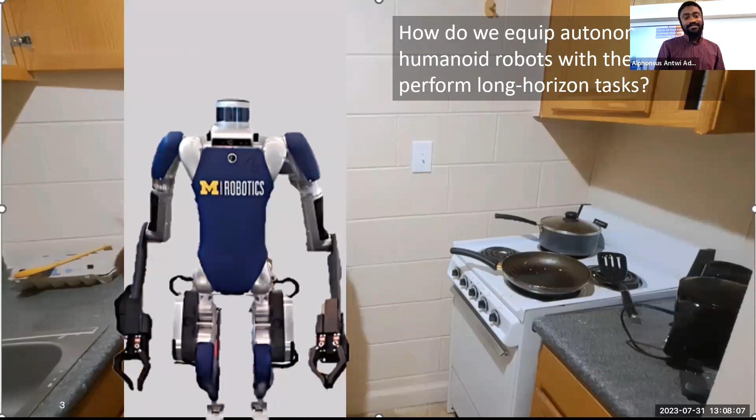During my PhD, I've been thinking of this main question: how do we equip humanoid robots with the ability to perform long horizon tasks? In summary, how do we replace the Alphonsus with the Digits and get it to do all of the kitchen tasks we want it to do, clean our kitchen, cook meals, etc.?

And you might be wondering, is this actually possible? Do we have humanoid robots that are capable of doing this? And I would say, yes, we actually do.

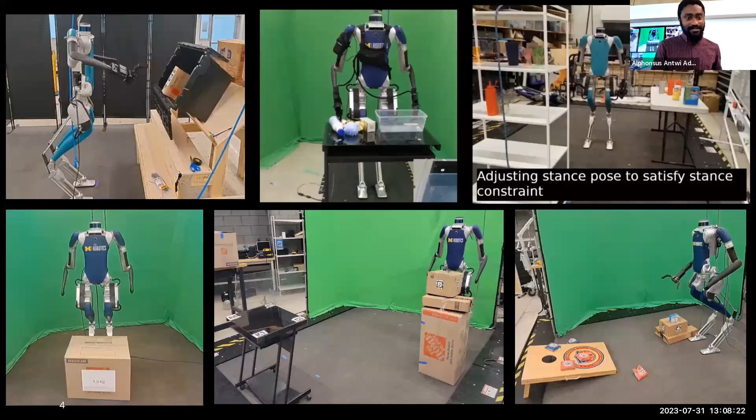You can see from these cascades of videos of the humanoid robot Digit doing some really cool manipulation and mobile manipulation tasks, like picking up a package from a bin, packing groceries into a container, transporting cookie boxes from one place to the other, lifting boxes of unknown masses, transporting boxes, and even playing cornhole.

And all of these videos are not high production videos. All of these videos were basically from experiments performed right here in the robotics department, mainly downstairs in the biped lab. So we certainly have the hardware and even the mature control systems to get humanoid robots to perform all of the domestic tasks we want them to perform.

So what is still holding them back? Why don't we all have Digits in our homes doing our chores for us? To answer that question, let's look at the domestic tasks in much more detail.

One domestic task we probably want Digit to do is our dishes for us. It's quite difficult to actually get a robot to do dishes, mainly because all of the dishes or objects it needs to manipulate are often in a clutter. There's going to be a difficult perception problem in detecting all of the objects of interest and figuring out ways to estimate their poses, because in clutter, the perception is going to be hard due to occlusion, poor lighting conditions, and even adversarial objects like translucent and transparent objects.

Another difficulty Digit might face is how to decide how to satisfy certain physical and geometric constraints. For example, how low should Digit squat to reach the bottom shelf, or how high should Digit stretch to reach the top cabinet? All of these are physical or geometric constraints that robots like Digit would have to satisfy in order to be able to pack the dishes after washing them.

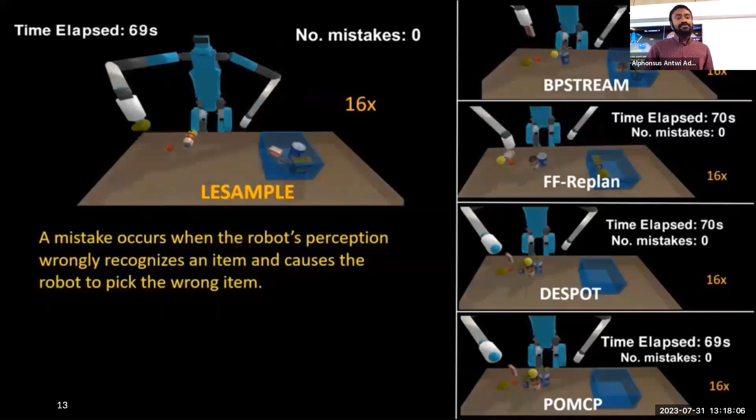So we start running the algorithms on each of them. Let's talk about a mistake. A mistake, as I said earlier, occurs when the observed effect of an action doesn't coincide with the expected effects of the action. Here, the robot expected to pick a tennis ball, but it ended up picking a pear because of perception errors.

Once this happens, the robot re-observes the world and repeats the whole LESAMPLE cycle. This is what we count as a mistake in the whole routine. It continues to perform the grocery packing based on the actions planned from this algorithm until it's done.

Now let's do some qualitative comparison between LESAMPLE and the other approaches. The first approach is FF Replan, a classical planning approach that doesn't account for any of the uncertainty in the state space. It assumes there is no uncertainty in the state space.

As a result, FF Replan ends up making much more mistakes than LESAMPLE, which accounts for the entire uncertainty in the state space. LESAMPLE ends up being more robust to perception errors than FF Replan, resulting in much fewer mistakes and faster task completion for LESAMPLE.

Next, let's look at BP Stream. BP Stream is a low entropy planning approach, however it replans after every action. Because it replans after every action, it performs much more planning than is actually necessary to accomplish the task, so it ends up taking longer than LESAMPLE to complete the task.

And then next, we'll look at the belief space planning approaches. POMCP is a belief space planning approach, and how it works is it uses a Monte Carlo tree search to plan on a belief of the scene estimates, whereas LESAMPLE uses a regular symbolic planner, which uses an A-star algorithm to plan on this belief.

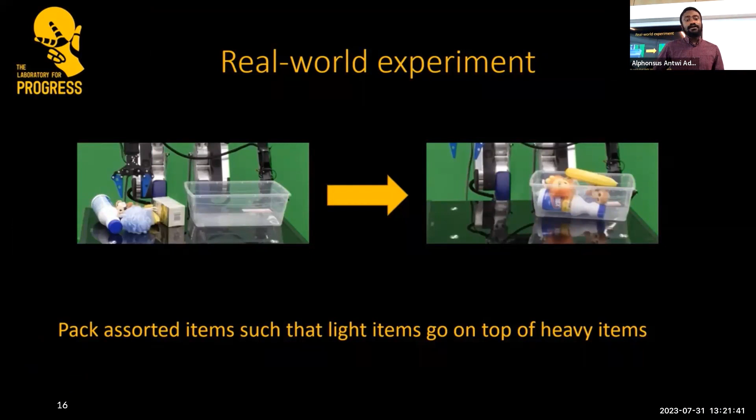We also go ahead to deploy LESAMPLE on the physical Digit robot and get it to pack some assorted items such that the light items go on top of the heavy items. Here we use an RGB camera to capture perception data of the clutter of objects on the table. We also fashion a manipulation system for Digit, because Digit doesn't come with a gripper. So we built this custom gripper manipulation system to get Digit to actually pick up these assorted items and place them in a bin.

Digit is basically packing all of these into a bin. And of course, you could tell that we chose objects that are good to go with the parallel plug grippers we had, because if we had chosen much more adversarial objects, it would have been very difficult to grasp. But we've been able to show that LESAMPLE runs on real world hardware and performs the grocery packing task.

So let's look at some summary and limitations of LESAMPLE. In summary, we propose LESAMPLE as an approach for fast and efficient task planning under low entropy object detection scenarios. In these scenarios, however, we were certain about the general locations of objects of interest. For the grocery packing task, we knew that all of the objects we are interested in are all on the table. Or if we were to extend this to the dish washing task, we know that all of the objects we want to wash are all in the sink. So we didn't have any uncertainties about where the objects are going to be.

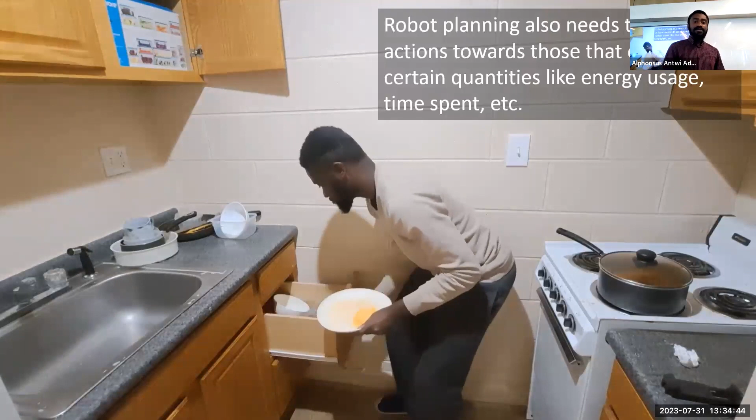And also I want my plan to optimize for certain quantities like energy usage or time spent, because humanoid robots have a lot of very powerful actuators. Digits, for instance, has a number of actuators, I think 20, and these require a lot of energy. So you wouldn't want them executing suboptimal plans that end up taking a lot of time and using up all the energy budget for performing a task. We want to be able to compute plans that are energy efficient as well as take much less time. So how do we formulate all of this in a single planning problem and get optimal plans for the kinds of quantities we're interested in?

To answer these questions and introduce our approach, let's look at some related work in this field. Symbolic task planners have existed since the 70s, and they plan purely in the symbolic, abstract domain. There have been some really cool approaches for symbolic planning, like Fast Downward, Fast Forward, Pyperplan, etc. These approaches are very fast, and they plan in a purely symbolic domain. They don't have any notion of real numbers or optimizing for any real quantities. Because of that, they can't be executed on their own on a physical robot. In order to actually execute a symbolic plan, they have to come up with a way of grounding them.

And so this leads us to sampling-based long horizon planning. This basically generates a symbolic plan, and then uses sampling-based routines like grasp sampling or motion planning sampling to generate continuous parameters for these symbolic actions, which can then be executed on the robots. Sampling-based motion planning often doesn't have any notion of optimality—it's only trying to satisfy certain constraints, so it's a satisfiability problem, not an optimization problem. Another drawback is you can only specify symbolic goals. You can't really specify a sampling-based task and motion planning algorithm to optimize for a specific quantity like energy usage. It's going to be very difficult to do that—they're not really designed for that, they're only made to satisfy symbolic goals. So we need a much more general task and motion planning approach, a long horizon planning approach.

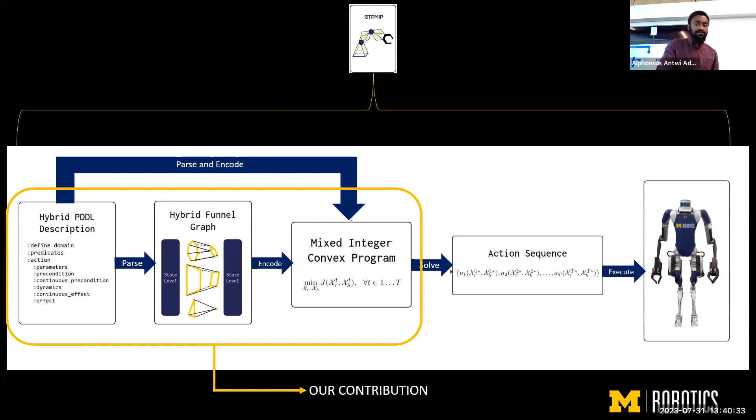So I talked a lot about mixed integer programming. What exactly is a mixed integer program? It's essentially an optimization problem, and it has all the various components of one.

It has an objective function, which is basically a function that returns a scalar value that we usually want to minimize. This function could be a function of the decision variables of our problem, measuring things like how much energy is spent in this plan, or how much time we spend. It returns a scalar value, and our goal is to minimize it. That's the objective function.

It's also subject to certain equality or inequality constraints. These constraints could be task constraints, like stance poses with respect to an object, or grasp poses with respect to an object, or whatever have you. So this could be equality or inequality constraints, or even joint limits.

But the peculiar thing about mixed integer programming compared to other optimization problems is that it generally allows you to optimize for both integer and real decision variables. This is the key feature that makes it good for task and motion planning, because it lets you optimize for both the symbolic actions, represented with integer values, as well as the continuous parameters, represented by real-numbered vectors. This quality of jointly optimizing for symbolic and continuous parameters lets us formulate our entire task and motion planning problem as a mixed integer program, which we can solve to output grounded plans that we can then pass to whole body controllers to execute.

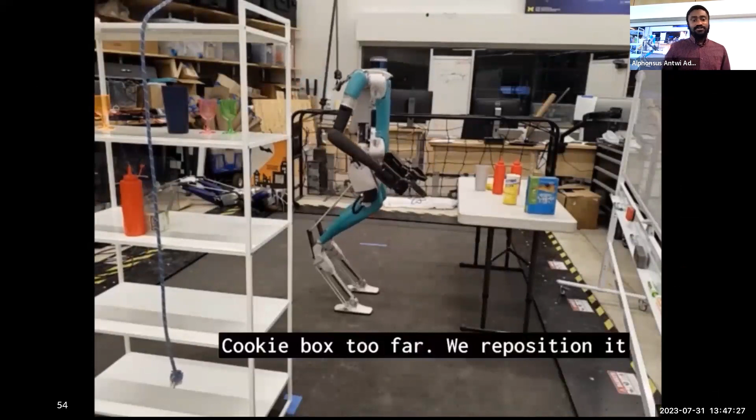Digit's task is to get this cookie box onto the second pane of the shelf. It first has to satisfy some stance constraints to be in the right position with respect to the table in order to pick up the box, and a grasp constraint to grasp it such that it doesn't fall from the gripper when it's walking. Then it has to place the cookie box on the second pane of the shelf.

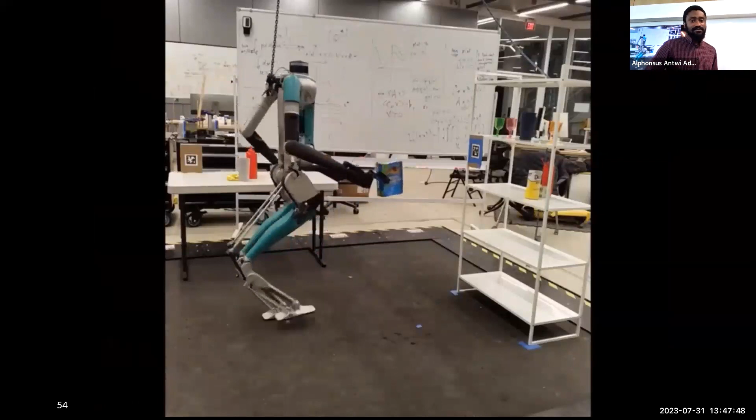It aligns itself to the box, and uses the April tag on the shelf to detect the shelf. Now it's in the right position, so it places the cookie box on the second pane of the shelf.

There are a lot of collisions because we are not actually doing collision avoidance - that's a much harder problem. So we're doing a bit of open loop here, but Digit gets the idea and is able to execute the plan.

So what are some conclusions of this work and some observations? At the beginning of this talk, we talked about planning under low entropy object detection, how to get robots to plan under low entropy detection. We came up with LC-sample to solve this kind of problem and get Digit to pack items into the bin.

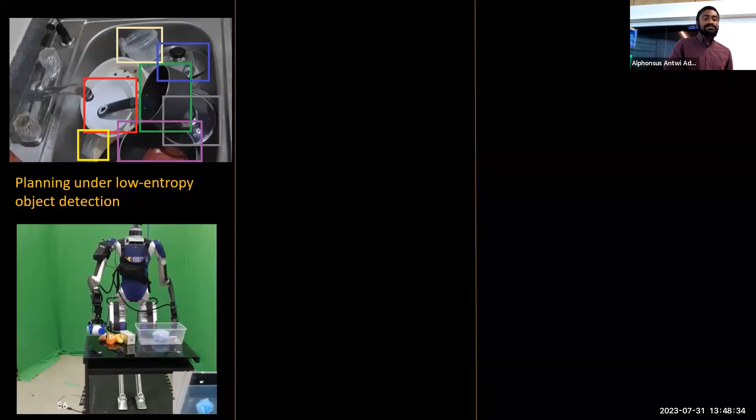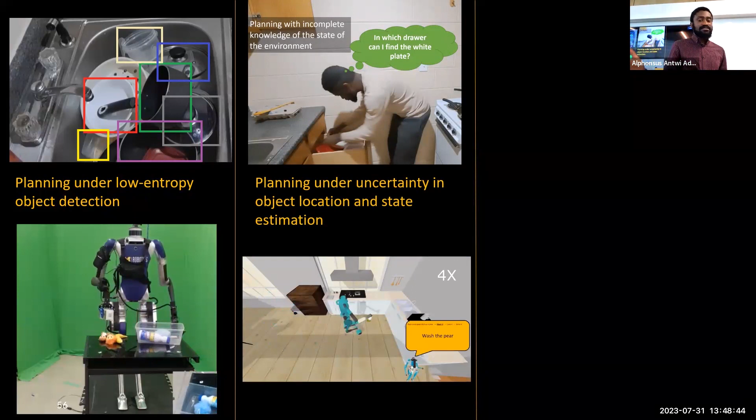We also talked about planning under uncertainty in object location and state estimation, and developed ShyCobra to account for the uncertainty in the location as well as the pose estimation of the objects. Finally, we looked at how to plan optimally under geometric constraints.

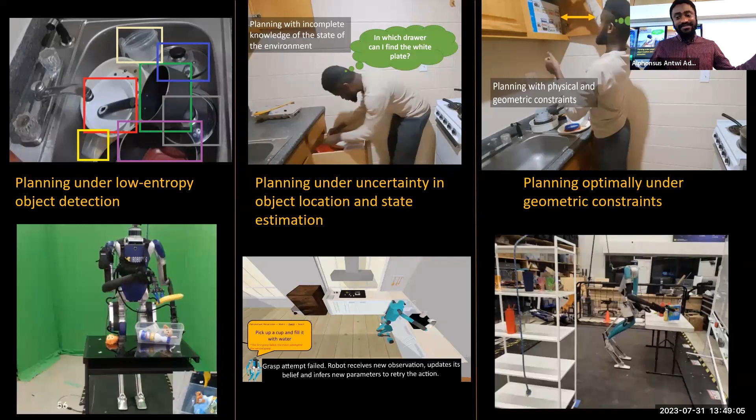We got Digit to pick up the cookie box and then place it on the second pane of the shelf. So can we declare that we've solved all of robotics? No, there's still a lot more work to be done.

What kinds of work do we need to do? Some potential future work which could be extensions of the work presented in this thesis are as follows. To get Digit to actually perform well in our homes, to get Digit to come home and do stuff, we have a variety of different kinds of tasks we do in the home.

In this work, for each of the various tasks we got Digit to do, I, as the operator, basically hand-specified these kinds of constraints we want Digit to satisfy in, say, GTPMIP, as well as the task goals. However, this is not scalable. We cannot assume that we know exactly how every home in the world is and the specific kinds of constraints we want Digit to satisfy when getting things done in a home.

It's probably going to be difficult because there are so many activities or actions you could perform in a home, and you can't just enlist all of them sequentially. So how do we come up with approaches for robots to infer task subgoals and constraints from human demonstrations? We know that human demonstrations are essentially infinite online.

There are lots of YouTube videos of people doing various home tasks, and if you could basically get one video and run it through some routine that's able to infer the kinds of constraints that need to be satisfied, or come up with another approach for learning the kinds of constraints and samples we need from human demonstrations, this would go a long way to allow us to program our robots without typing stuff - just program through demonstrations.

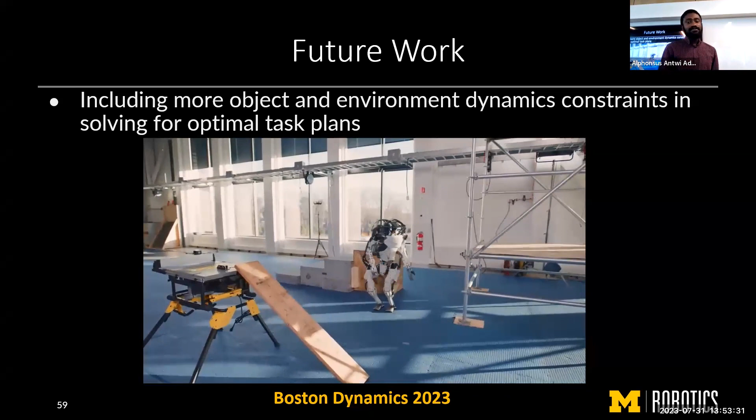One thing is all of these sequences of actions were scripted. They didn't actually plan the right sequence of actions to perform; they sat down and came up with a script of like, do this, pick this up, then go there and do this and that. So all of this wasn't autonomous. They basically designed it just like a movie director would direct a movie.

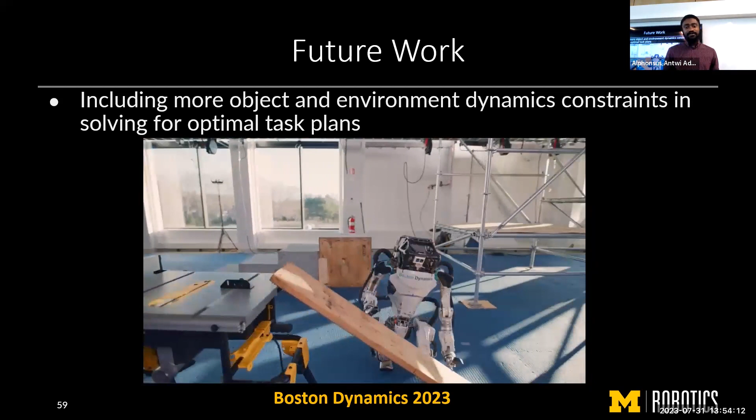However, to get robots to be fully autonomous in the true sense, we want robots to figure out how to come up with these sequences of actions by itself—how to decide, yes, I want to pick up this bag first before I pick up the plank of wood, and I have to squat this much because the object is very heavy, and if I don't squat enough, I won't get enough torque to lift it up. All of these are things we'd want robots to figure out autonomously on their own.

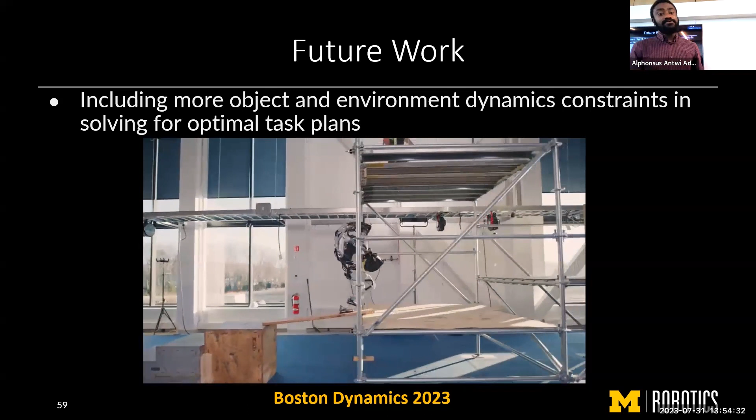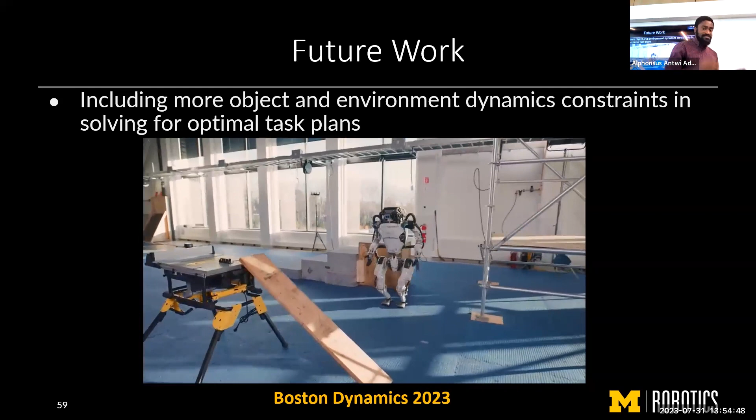One thing I've learned is that the more object or model information you give to your algorithm, the better it's able to execute and perform in real life. So how do we give this dynamics information, not just on the low-level controller side as in this video, but actually on the task planning side, where the robot is able to reason about the mass and inertias of objects when deciding the sequence of actions it needs to perform?

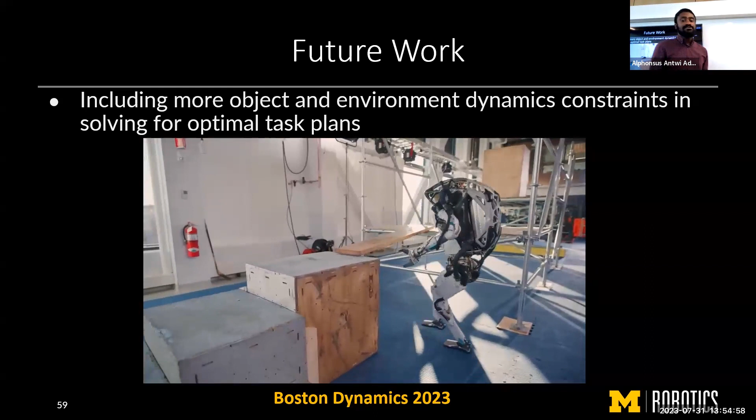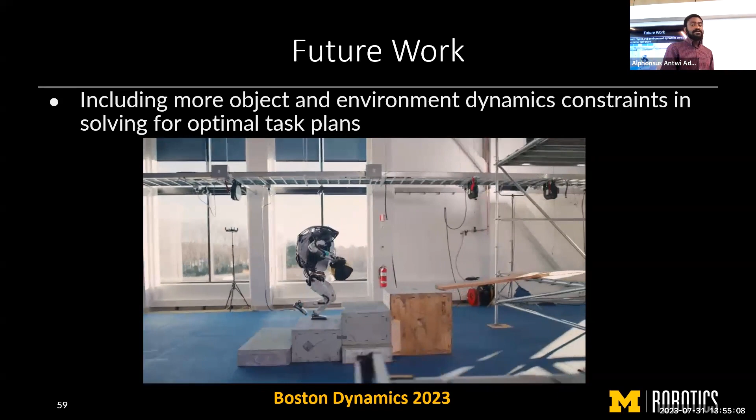So how do we formulate such a task and motion planning program to get this to actually work on a real-world robot? We need to come up with a way of doing this if we're going to get robots to help us in construction, in the kitchen, or to lift heavy loads for us. This is also a very interesting potential future work that would certainly move the field forward and get us closer to having robots in our homes.

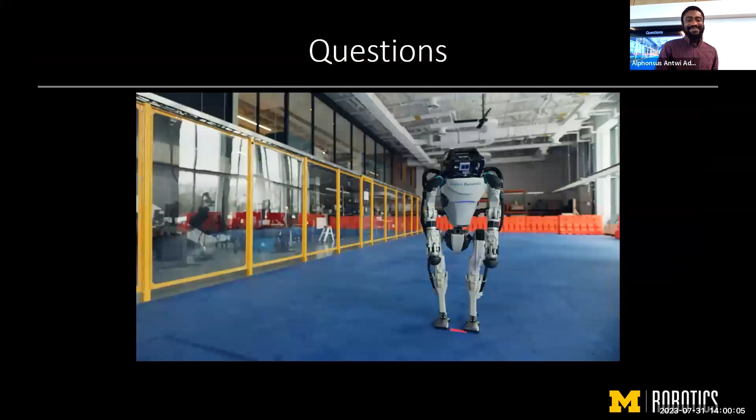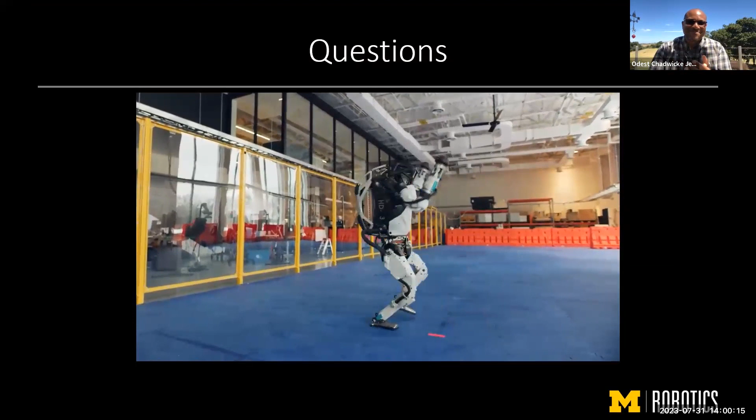And as Professor Messner mentioned, I'll be joining Boston Dynamics in the fall to work on whole body control. So thanks to everyone. Yeah.